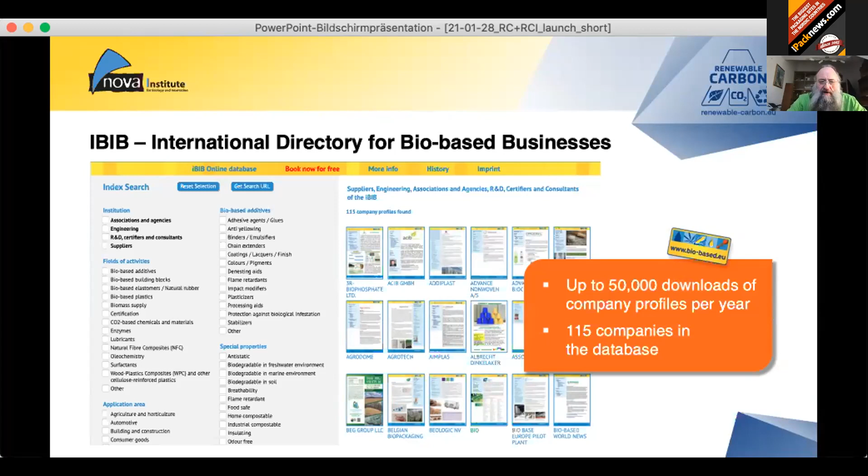Now I come to the renewable carbon concept. You know Ursula von der Leyen, European Commission, Green Deal, and reducing emissions by at least 55% by 2030. A few months ago, this target was made even more strict. Before, it was 40%, and now it is 55%. And it is not easy to achieve this target.

One of the very important backgrounds of the whole initiative is, where are the carbon emissions coming from? What is the real reason for our greenhouse gas emissions? If you look to the IPCC report and make a little different clustering than usual, then you will see that 80% of the greenhouse gas emissions are directly related to fossil carbon from the ground. So we're taking crude oil, natural gas, or coal from the ground and bringing this carbon into the technosphere and atmosphere. And this has to be stopped as soon as possible because this is 80% of the impact.

You can ask yourself, what are the other 20%? The other 20% come mainly from land use changes. So if you destroy rainforest or you switch from grassland to agricultural land, then you also have emissions. These are the other 20%. But the main point is additional fossil carbon.

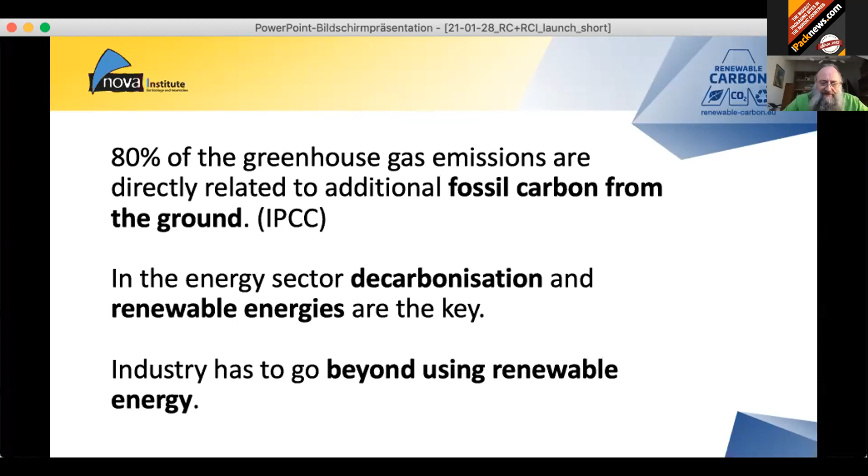In the energy sector, there are clear strategies in Sweden, in Denmark, everywhere about wind, not so much solar in the north, in the south more solar, hydrogen coming from using water for electricity, for example. There are many ways in the energy sector to decarbonize, but the industry has to go beyond renewable energy, because if you go to our sector, chemicals and plastics, you need carbon. You cannot decarbonize your polymers and plastics.

So we think that the equivalent to decarbonization in the energy sector is a transition to renewable carbon in the chemical and material industries, and how we can substitute the fossil carbon from the ground by other carbon feedstocks. And this is the key of the initiative, renewable carbon. And I will explain a little bit further what it means.

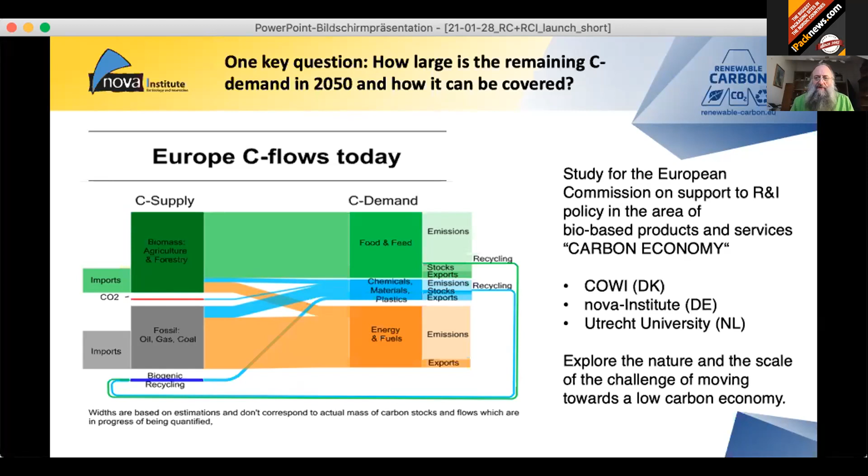I'm not allowed to show the results for 2050 so far because the publication is not out, but we made different scenarios for 2050 to identify which carbon demand comes from chemicals and materials and how this can be covered.

Yeah, to have a quick summary so far, decarbonization is a good strategy for the energy sector, but no issue for chemicals and materials. There is a lasting need for carbon. This is often not well known to the public. 80% of the greenhouse gas emissions are directly related to this additional fossil carbon.

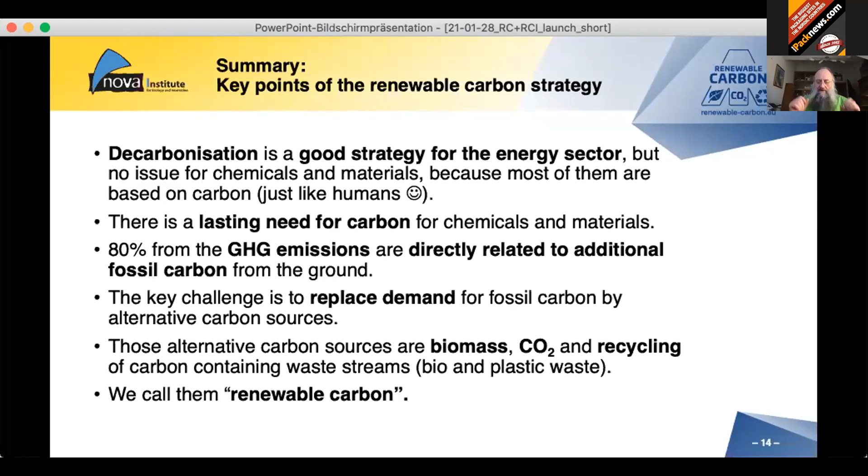The key challenge is to replace the demand for fossil carbon, and those alternative carbon sources are biomass, CO2 and recycling, and we call them together renewable carbon. So we have also a nice clear definition. Renewable carbon entails all carbon sources that avoid or substitute the use of any additional fossil carbon from the geosphere.

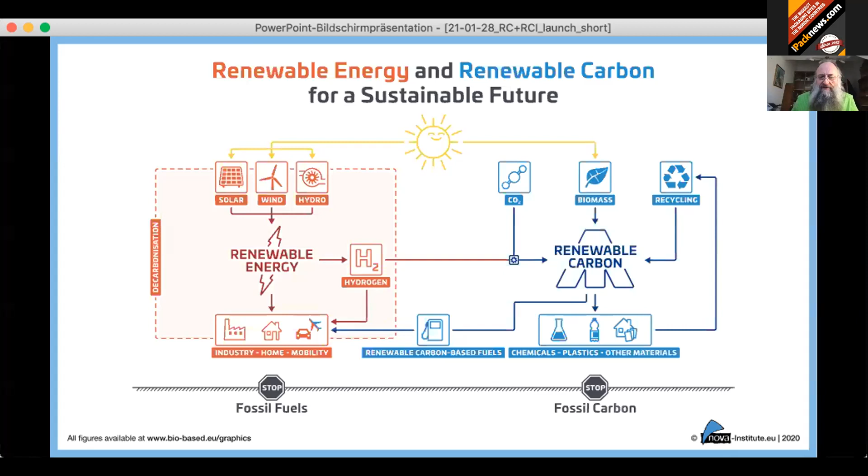And so we can keep producing all kinds of products, but not using additional fossil carbon. The only pathway to the energy sector are the carbon-containing fuels. And this is mainly kerosene. Kerosene is not easy to replace by hydrogen or electric batteries.

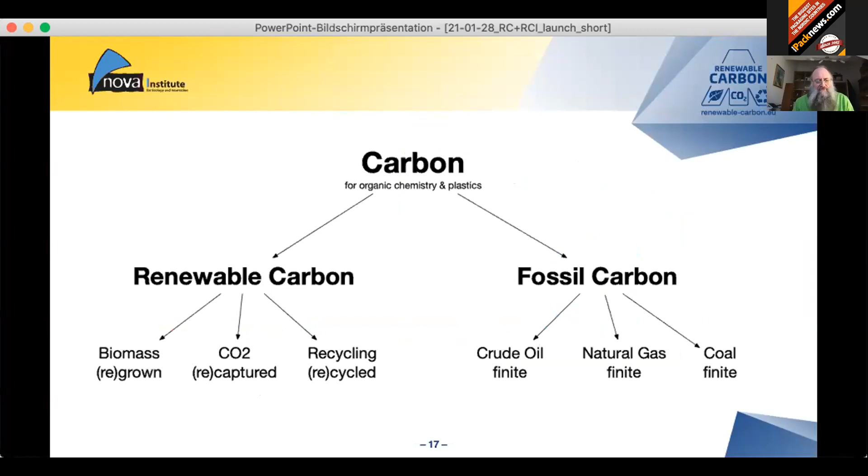Yeah, so if you need carbon, we have two choices. We have the fossil carbon on the right-hand side, crude oil, natural gas, or coal. We should stop this. And on the other side, we have the three: biomass regrown, CO2 recaptured, and recycling recycled. Yeah, I don't think I have to go into too many details here. All kinds of biomass are accepted here: first, second generation, side streams, bio-waste.

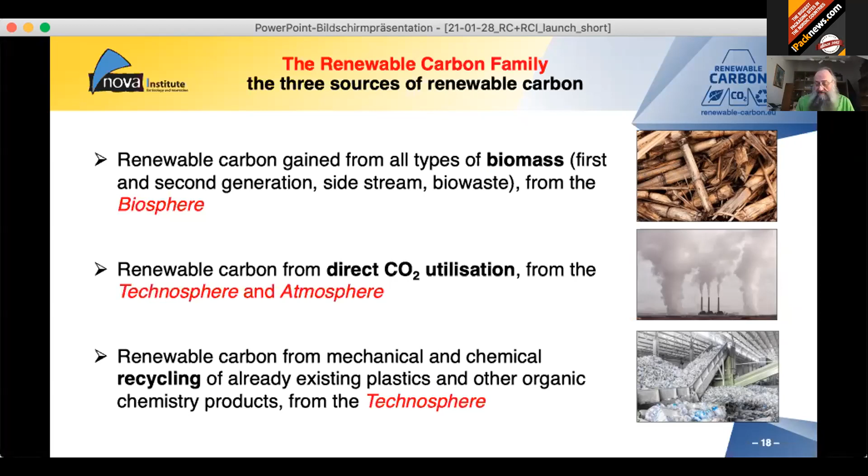For CO2, we have point sources like power plants or industry, or also fermentation factories, or we have direct air capture from the atmosphere. In the technosphere, we mean all kinds of plastics and other organic chemical products we can use in mechanical or chemical recycling. This is the next point in the next presentations.

If we look at strategy in detail, the most important thing here is that today we see a lot of fight and competition between bio-based, CO2-based, and recycling, and don't fight brother wars. The winner will only be fossil carbon. We have to share and win and bring the three solutions together. The best thing would be to also have a joint policy on the three carbon sources, but this is a dream we're working on.

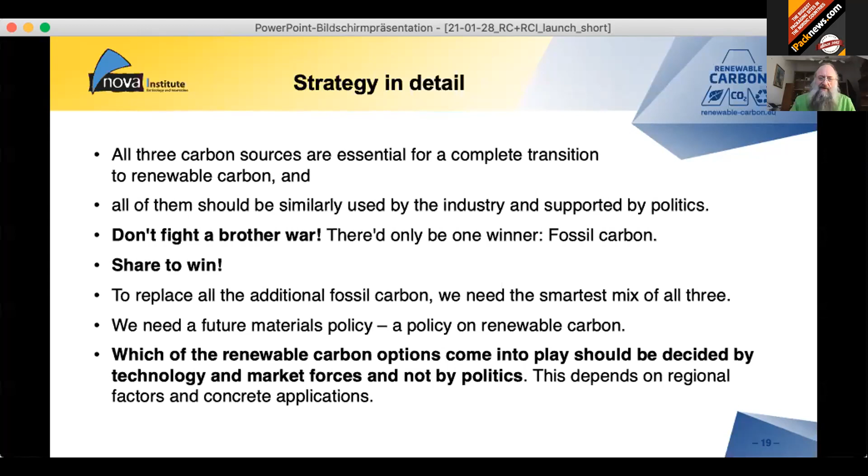If you see the plastics overview of how it looks today, we have for the fossil-based plastics about 360-380 million tons production worldwide. The growth rate is 3 to 4% per year. Bio-based, we have 4 million tons. I show only one slide here, not the topic today.

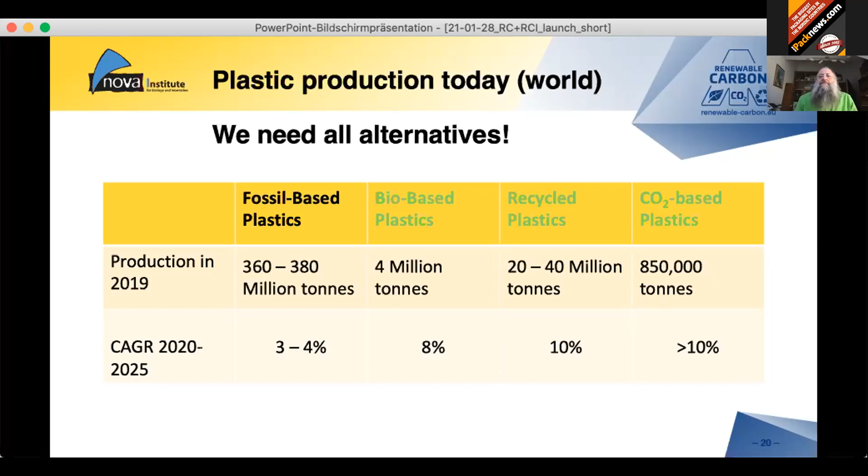4 million tons. Recycled, we have worldwide 10 times more, 20 to 40 million tons, mainly mechanical today. And in CO2-based plastics, we have already production of 850,000 tons. Surprising for you, but I'll show some details in the next slides.

This is one of the possible futures of the polymer sector. You see the production volume 2018. And then if the growth rates continue like in the last 10, 15 years, we will come up in 2050 with 1.2 billion tons of plastics. Let's also show we need to solve problems like microplastics and others, and also the image, because this cannot happen in the wrong social and policy framework.

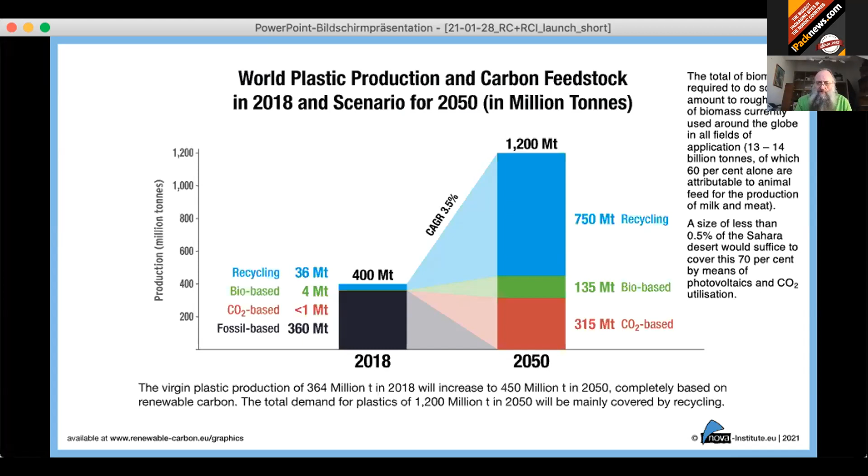But if it would continue, and this year will show the same trend as last year, then we have really a big amount. And this can be covered about 60% by recycling. Of course, chemical recycling is an important part here, by bio-based and by CO2-based. And if you look to the numbers here, what areas you need and so on, it's really possible to do this in a sustainable framework.

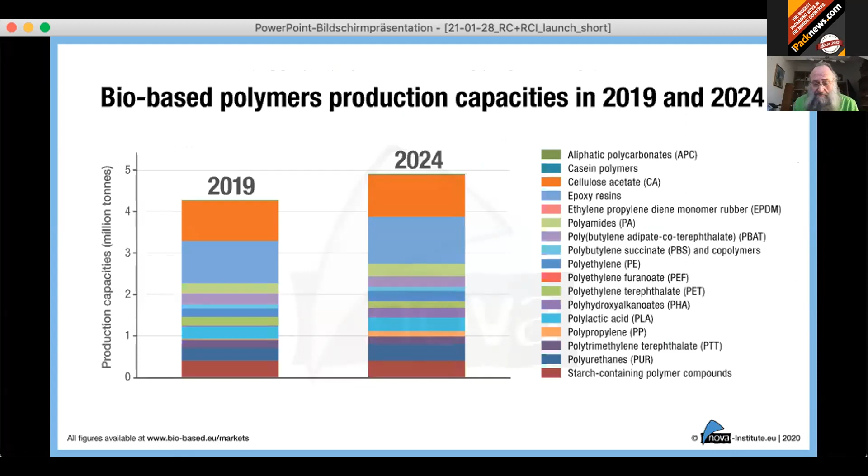And we go in a little bit more detail here from our reports. The bio-based polymer production capacity is today a little bit higher than 4 million, and it will in 5 years be around 5 million. And there are 17 commercially used bio-based polymers on the market. But you can receive the slides later, and also the new report is released today, so the press can also get new numbers, because what's happening now is really exciting.

We saw in the last years in the bio-based area growth rates like in the fossil-based, so no additional shares. The main reason was no political support. But we see now a new trend. Now we see very new data here, and much higher growth rates, up to 8% for polymers, and the building blocks even 11%. So we see really a new trend for the next 5 years. And the reason is not the political framework, but that brands are really looking for non-fossil solutions.

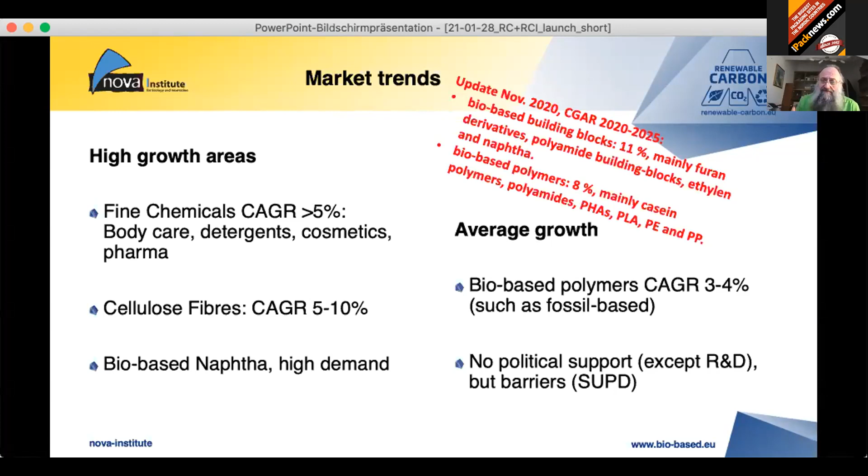One example, Unilever has said that by 2030 they're not accepting any fossil carbon in their detergents, and they're putting pressure on their supply chain that they're not accepting fossil-based detergents. That's a big step. And we see this in a lot of other brands too, and this is speeding up the demand for those new solutions.

When we look to the CO2-based polymers, this picture shows the pathways from the left-hand side, CO2, different processes, chemocatalytic and fermentation and others. And then you see on the right-hand side some specific polymers you can mainly make from CO2, but you see also polyethylene, polypropylene, PET. So finally, with CO2, hydrogen, Fischer-Tropsch, and naphtha, for example, or methanol, all polymers and plastics we know today you can also produce from CO2.

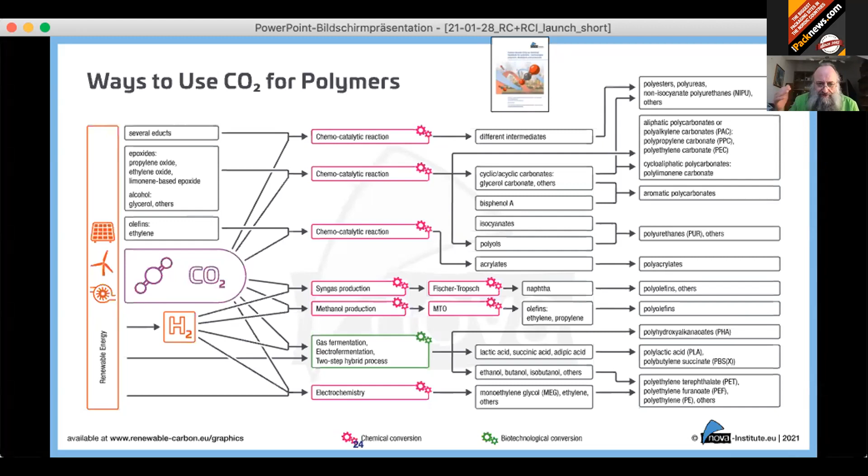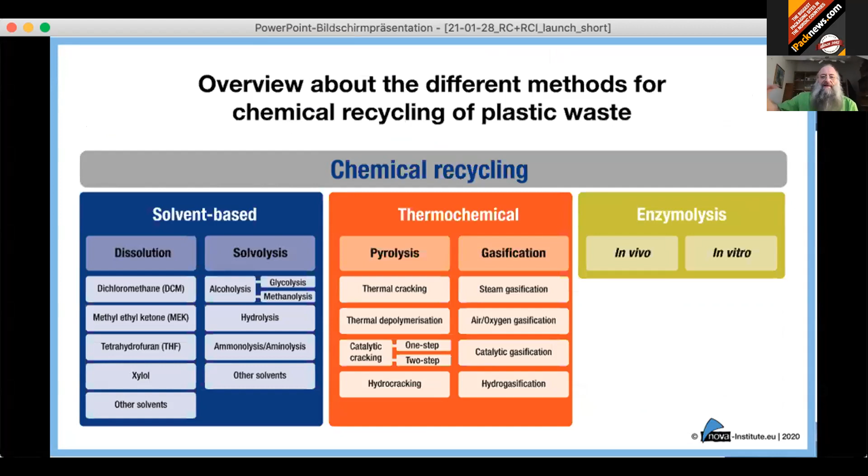It's just a question of the costs for renewable energy. And you have some areas today where you have renewable energy for 2-3 cents a kilowatt hour. And here you can really start using CO2 also for polymers. And another report also published today gives all details on these pathways. On recycling, Lars will show this, so I have only one slide. So chemical recycling is another way to bring plastics back as feedstock.

Now my last slides are on the initiative. The Renewable Carbon Initiative was founded and launched in September 2020, so it's very young, 4 months old only. And the aim is, of course, to support and speed up the transition from fossil carbon to renewable carbon for all organic chemicals and materials. And companies joining it have a lot of benefits.

If you have questions, I will go into details. But I think there are mainly 2 things that are attracting companies to join the initiative. The one is they really love this concept of renewable carbon, because many companies are working in bio-based, in CO2-based, and in recycling, and they want a joint strategy. And so for many companies, our initiative is just the right way to go, because they're anyway going in this direction. So these companies like that we spread this message around, that we have a lot of press releases, contact to the commission, as I just showed to you.

The other part, companies joining it want to have the network. They want to really build up value chains. They want to have solutions. They want to have access to CO2-based polyethylene, to used cooking oil-based polyethylene, those things. So their hope is that in this network of companies, they can really create new processes and value chains.

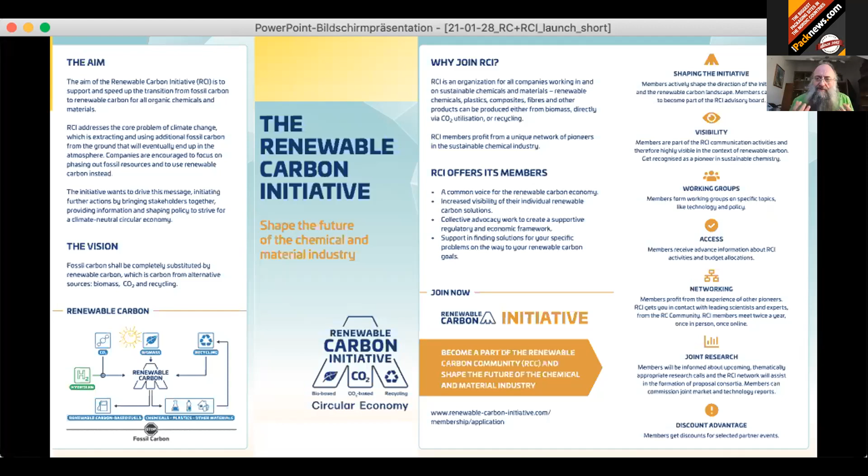Here's a question. I can just look whether it fits now. As I end my presentation, then I go to the questions. So this is, I think, more successful than we expected.

And if a company present today wants to join, the first step is to have a one-hour meeting with me, so that we can discuss all the details: what are your benefits, what you have to deliver. And after this discussion, many companies start the process of joining the initiative.

And my target is to have in 1 year 100 companies, so that we have really a strong initiative, which has also a voice in Brussels, in Berlin, in Copenhagen, in Stockholm, wherever it's needed. We have also a lot of personal supporters, nearly 180, which are often very famous experts in their areas, but they could sometimes not yet convince their companies to join as members.

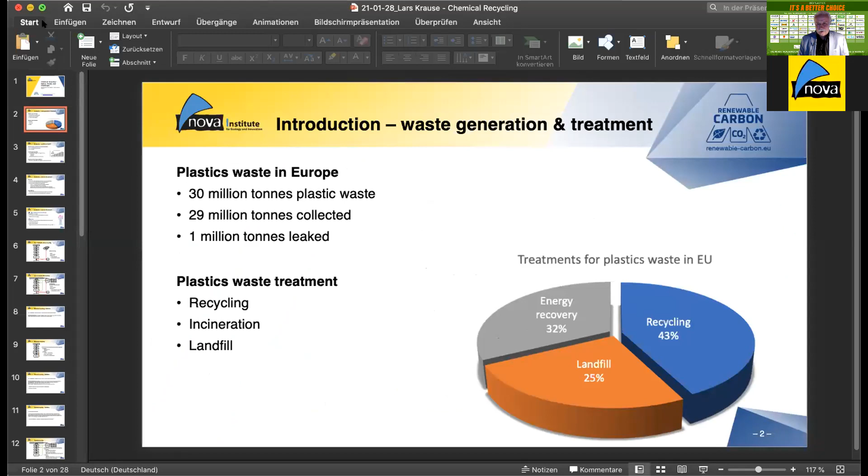All right, Michael, thank you very much for your participation here. I think we have to continue now, and I will hand over to Lars Krause, also from Nova Institute, who will give us an update about chemical recycling today, because there's been a lot of talking around chemical recycling as an alternative for the future. We have mechanical recycling, composting and all that, but I think we will never reach a level where we can recycle everything. But chemical recycling seems to be a very interesting step towards much more recycling, actually. So, Lars, please, the screen is yours.

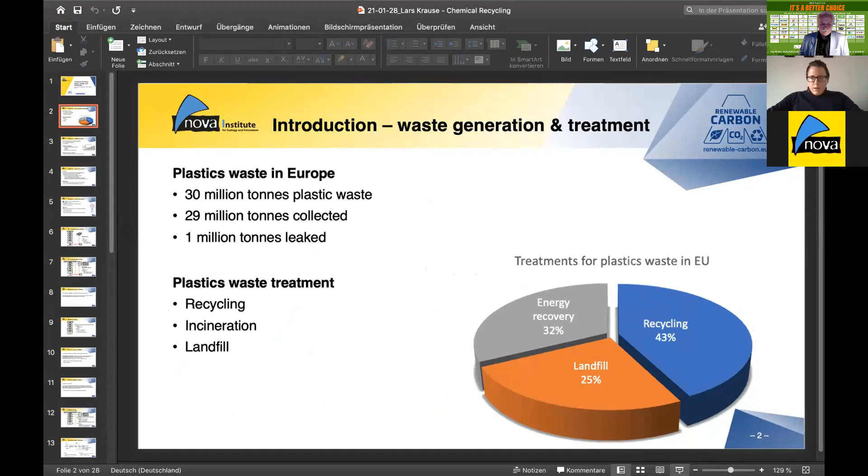Hello everybody, and welcome to my talk, in which I want to give you a brief overview about our recently published report titled Chemical Recycling: Status, Trends and Challenges. This report will cover several aspects around the topic of chemical recycling, including the technologies, the sustainability, policy and key players. In today's talk, I want to focus a little bit stronger on the technologies, but I will also cover several other aspects.

Before we go into the topic of chemical recycling, we need to take a small excursion through the waste generation and treatment in Europe, as well as the quite ambitious recycling quotas which were set up for the European Union.

So in Europe, approximately 30 million tons of plastic waste are produced, and 29 million tons of this waste is collected, leaving approximately 1 million tons of plastic waste that is leaked into the environment. From the collected plastic waste, approximately 43% is recycled, 25% is going into landfill, and 32% is going into incineration for energy recovery.

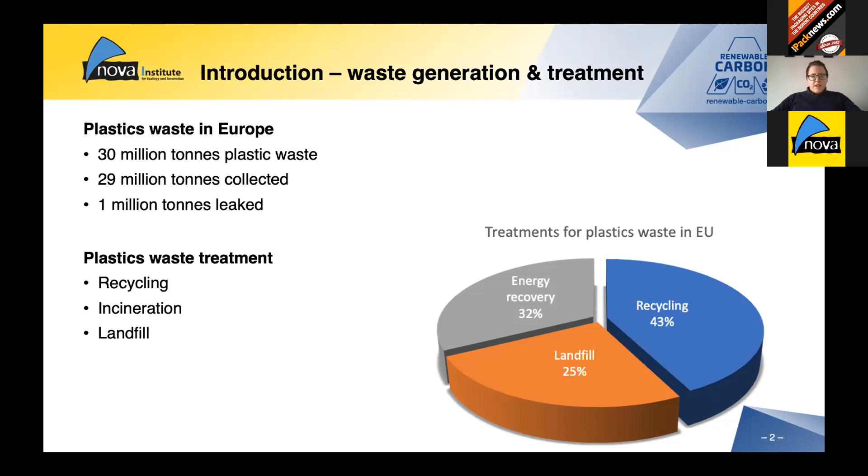The European Union has set up quite ambitious recycling quotas. Until 2030, it's planned to recycle approximately 70% of all packaging materials and 55% for all plastics in this packaging materials. The European Green Deal goes a step further: it's communicated that until 2030, all packaging materials should be either recyclable or reusable, and as a long-term goal, until 2050, the European Union will be climate neutral.

So the question is now, how do we achieve these ambitions. In general, we have 5 options available: prevention, reduce, reuse, recycling, as well as alternative feedstocks. Let's go through the different options.

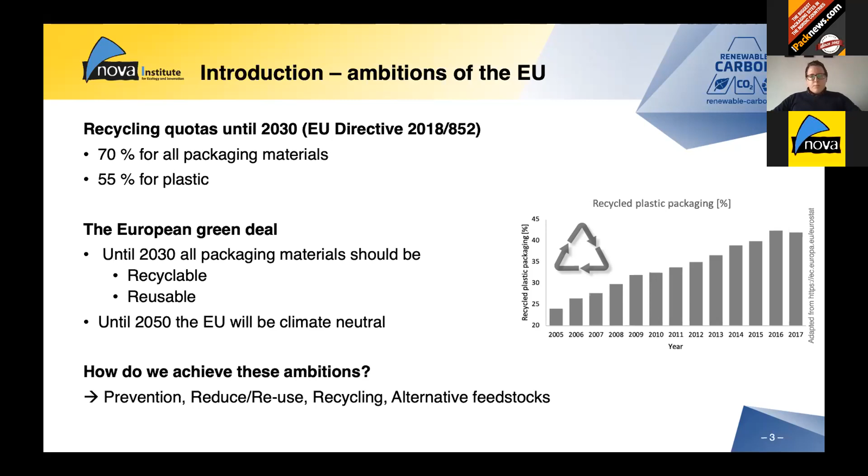Prevention is economically and ecologically sensible for only a few applications, because there's nearly no alternative available for most of the applications. The reason is the overall performance and efficiency of plastics, here we have the density and strength. So plastics represent very strong, but at the same time, very lightweight materials.

Another plus is the general processing properties of plastics, they can be easily formed and reshaped via heat application. Then we have the large sector of specialty and high performance materials, as Michael already told us, so we have a range of plastic products with tailored properties. In general, plastics have better performance than other materials for most sustainability criteria.

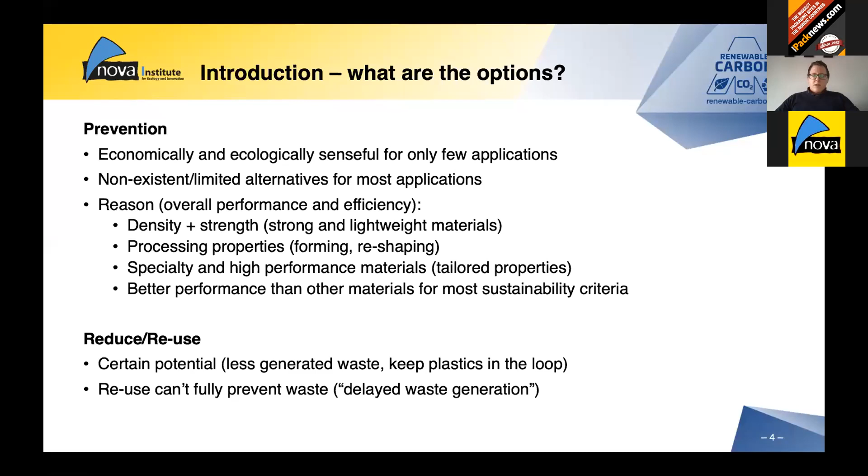Then we have the options of reduce and reuse. Of course we can reduce the amount of plastic waste via intelligent product design, so less plastic waste will be generated then. In case of reuse, we have the option to keep the plastic longer in the loop, but it can't fully prevent the generation of waste, so it's more or less a delayed waste generation.

Now we come to the 2 other options, which are also part of our renewable carbon initiative. First of all, we have the alternative and renewable feedstocks, so bio-based or CO2-based feedstocks. These feedstocks prevent the introduction of fossil carbon into the cycle, but this is not a direct solution for the waste, it's only a solution for the emission of greenhouse gases and the introduction of fossil carbon into the cycle. And then we have the last option, recycling.

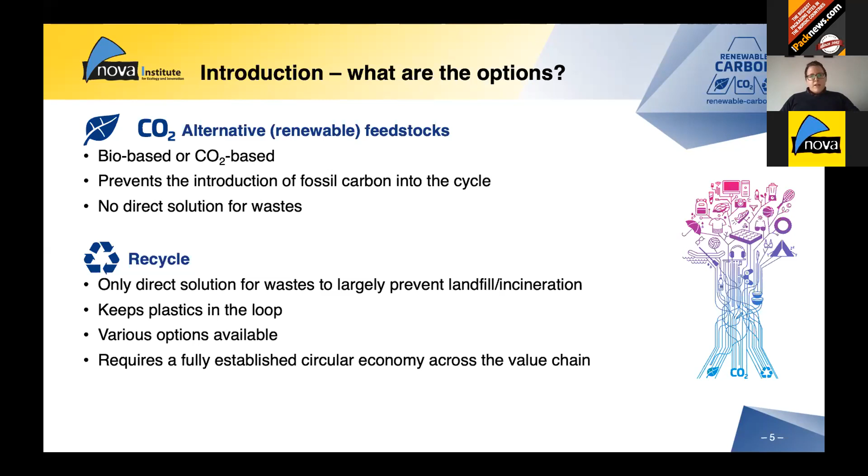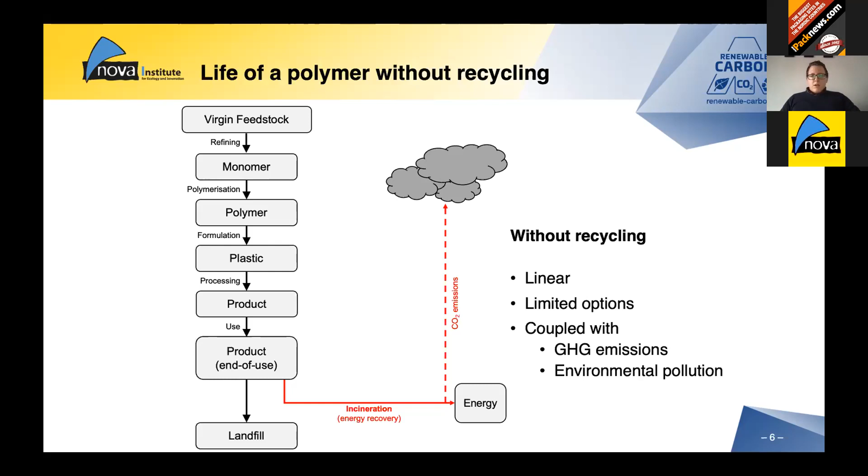Recycling is the only direct option for waste to largely prevent landfill or incineration. Recycling keeps the plastics in the loop, and we have various options available. However, recycling requires a fully established circular economy across the value chain. Let's keep in mind, without recycling, the life of a polymer would be very linear, so we have only limited options to treat plastic waste, in general incineration and energy recovery or landfill, and these solutions are always coupled with either greenhouse gas emissions or environmental pollution.

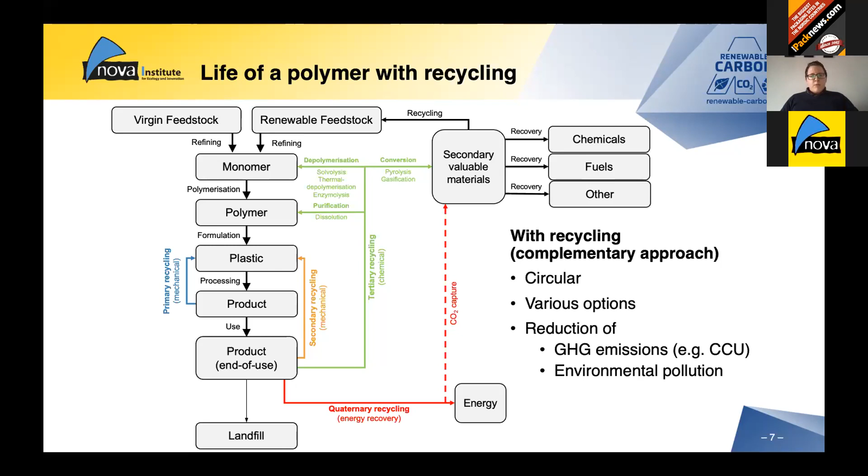Let's go through the different recycling options we have, and let's start with mechanical recycling. The ISO 15270 defines mechanical recycling as processing of plastic waste into secondary raw material or products without significantly changing the chemical structure of the material.

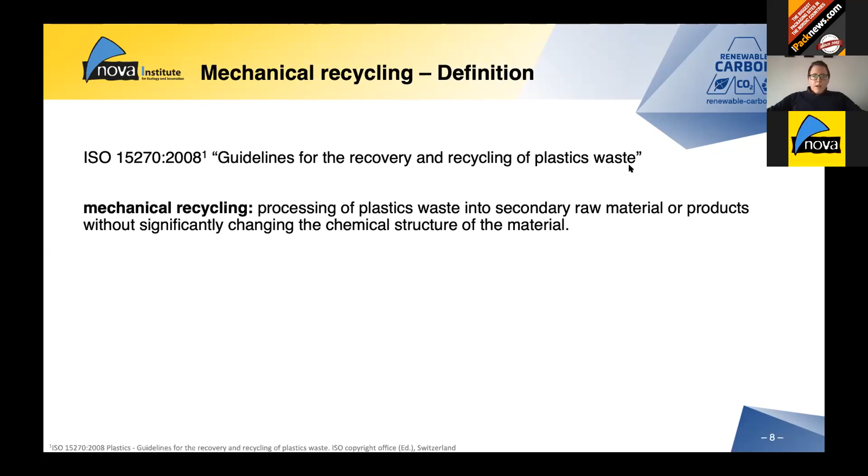Mechanical recycling can be divided into primary recycling and secondary recycling. Primary recycling is more or less in-plant recycling, and secondary recycling is more or less the recycling of post-consumer products. Mechanical recycling has certain advantages: it's a very well-established technology, and the technology is characterized by its simplicity.

However, we have some limitations. Mechanical recycling is limited only to thermoplastics, and we need some kind of pure fractions. For in-plant recycling, it's not that problematic, but for post-consumer products it can become a huge problem, because the waste streams need to be pure. We need one kind of polymer material, and it needs to be cleaned from other organic wastes and maybe also sorted according to color. So it can be a huge problem to recycle this very heterogeneous waste.

The other limitation would be that contaminations are not removed from the waste stream.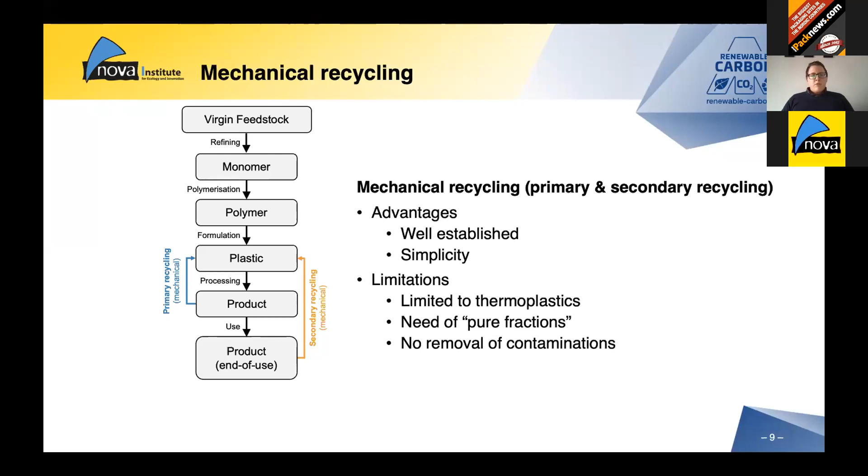And now we come to chemical recycling. If we want to show you a definition for chemical recycling, we have a lot of different definitions available. They are partially contradicting each other. And if you look at all the available definitions, we see that there are in general two different approaches.

We have one scientifically motivated approach and the more political approach. Here you see from ISO 15270 a more scientifically motivated approach. Chemical recycling is defined as conversion to monomer or production of new raw materials by changing the chemical structure of plastics waste through cracking, gasification, or depolymerization, excluding energy recovery and incineration.

This definition would include different technologies such as Solvolysis, Pyrolysis, Gasification, and Enzymolysis. But it will exclude the technology Dissolution, because here the chemical structure of the polymer itself remains unchanged.

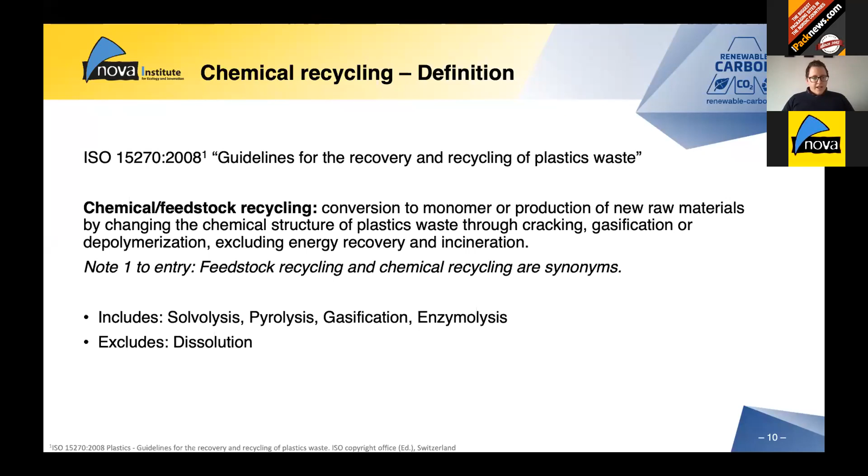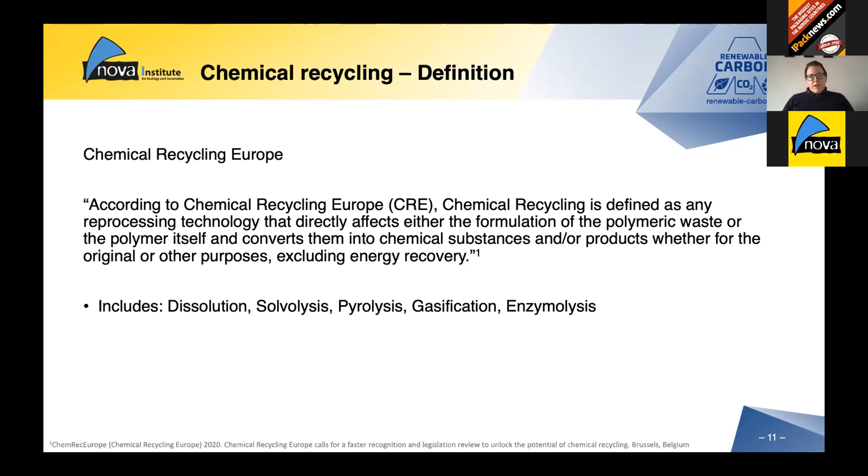This here is an example of a more politically motivated definition, done by Chemical Recycling Europe. Here chemical recycling is described as any reprocessing technology that directly affects either the formulation of the polymeric waste or the polymer itself and converts them into chemical substances and/or products, whether for the original or other purposes, excluding energy recovery. In this case, dissolution would be included besides Solvolysis, Pyrolysis, Gasification, and Enzymolysis.

If we now include all these chemical recycling technologies together, we find some advantages over mechanical recycling. We are not limited to thermoplastics only — the only exception would be dissolution, but the other technologies are not limited to thermoplastics. We have no need of pure fractions, so they can be more heterogeneous compared to mechanical recycling. Contaminations are also removed from the waste stream, and the material is characterized by high quality.

But we have also some limitations. Chemical recycling can be really complex. It is not well established due to the lack of large-scale units. And we have some difficulties proving the sustainability of the different technologies.

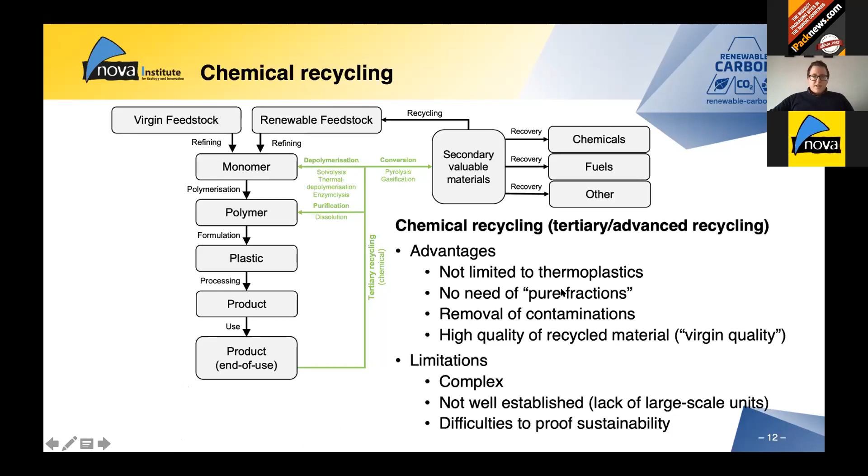Let's go through the different technologies, starting with dissolution. With dissolution, a target polymer can be dissolved in a suitable solvent, and all the other components in the plastics, such as fillers, other polymers, additives, pigments, and so on, are not dissolved. So these components can easily be removed from the target polymer, for example via filtration.

Then an anti-solvent can be added to the solution, and this initiates precipitation of the target polymer. The target polymer can then be removed from the solvent, cleaned and dried. So in the end you have a really pure polymer extracted from the plastic. The remaining solvent can also be recycled, for example via distillation.

The dissolution technology has several advantages. On one hand, we have selectivity for certain target polymers. We can address mixed and multi-layer material, and the output can be directly used — so in comparison to Solvolysis, we don't need to repolymerize the polymer. Toxic substances can also be removed from the waste stream.

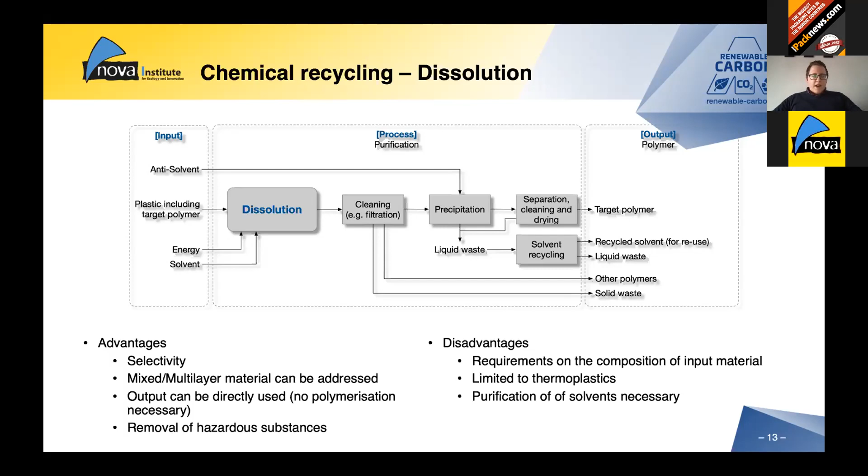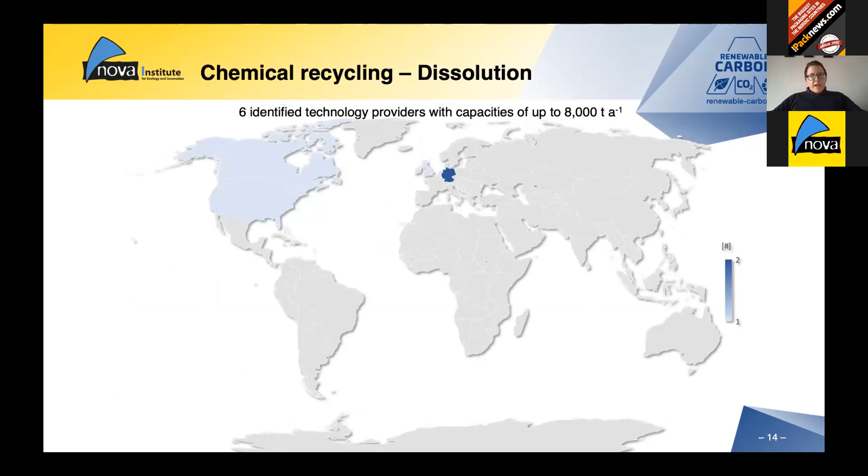In our report, we identified worldwide 6 technology providers for dissolution, and they already have capacities of up to 8,000 tons per annum.

Now we are coming to Solvolysis. In general, the process works as follows: a target polymer can be depolymerized into its building units with a suitable solvent. The building units would be monomers, dimers, or oligomers. After this process, the monomers need to be purified in order to be repolymerized into the polymer again.

So here we have an additional step compared to dissolution. Depending on the utilized solvent and mechanism, we can divide Solvolysis into alcoholysis, including glycolysis and methanolysis, and we also have hydrolysis and ammonolysis.

Here again, the advantages are very similar to dissolution. We have selectivity for target polymers, we can process mixed and multi-layer material, and toxic substances can be removed from the waste stream. The disadvantages are also a little bit similar.

So here again, we have the requirements for the composition of the input material. So we need a certain amount of our target polymer. And the solvents also need to be purified again. And here polyolefins and polystyrene cannot be processed with this technology.

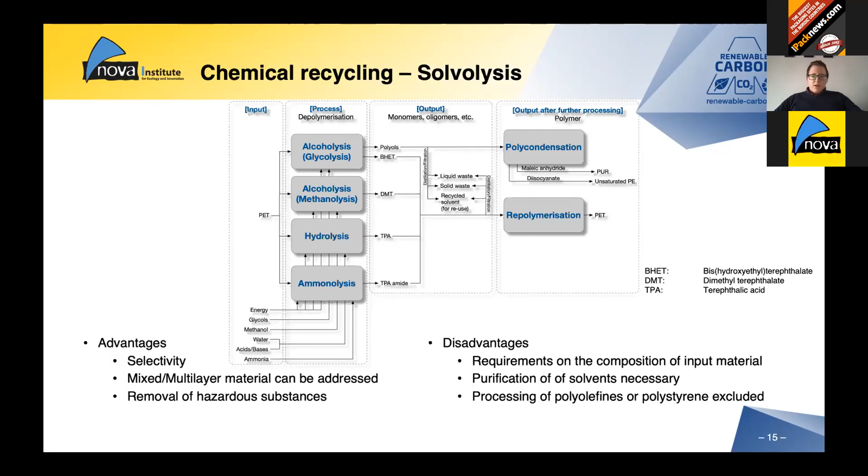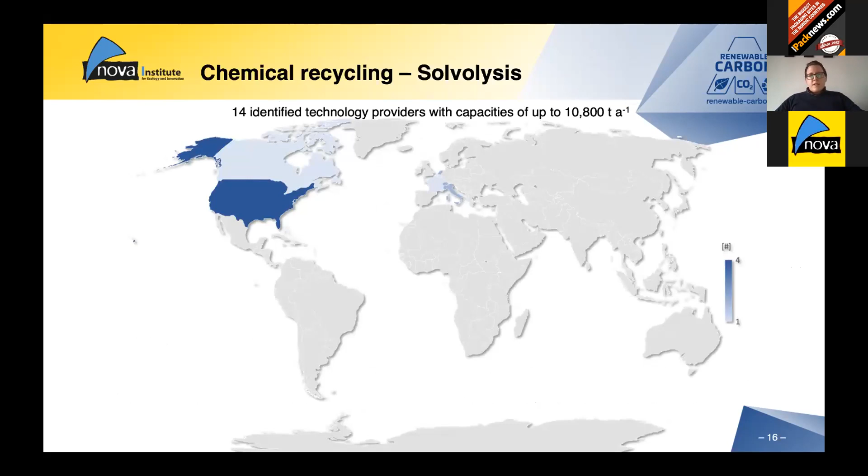For the solvolysis, we identified in our report 14 different technology providers with capacities of up to 10,800 tons per annum.

With pyrolysis, we can process really heterogeneous waste streams into different solids, gases, and liquids. This happens in presence of heat and absence of air. The products are secondary valuable materials or monomers of the polymers. So we can obtain from this process syngas, different liquids such as diesel, naphtha oils or monomers, but also waxes and char.

A part of the needed energy for the process can also be obtained from the partial combustion of the feedstock. So it can also be provided by the feedstock itself. And on the advantage side of this process, we have that a range of different input materials can be processed. So even plastic waste together with some bio-waste. We have a large spectrum of obtained products, and toxic substances can also be removed.

But we have also some disadvantages. These are the high energy demand, the emission of pollutants. We have less selectivity for products. So on the one hand, the large spectrum can be an advantage, but it can also be a disadvantage, especially if you really want to obtain a special fraction of all these different products.

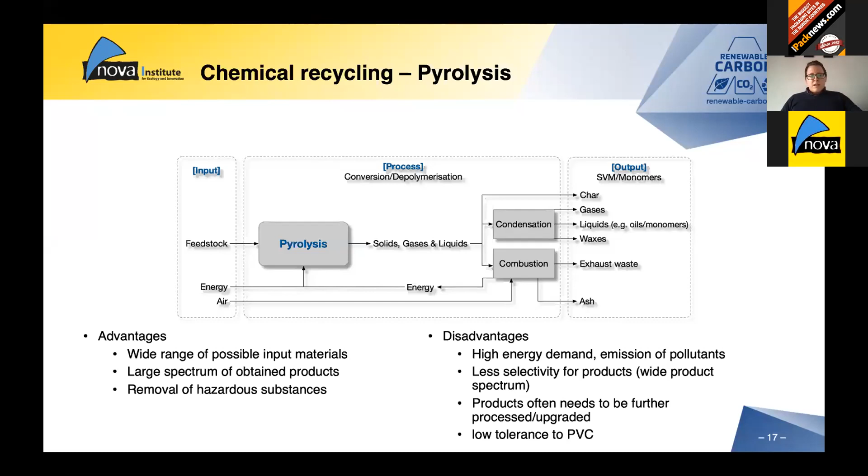Another disadvantage would be that the products often need to be further processed or upgraded, and the process has a low tolerance for PVC. In our report, we identified 44 technology providers for pyrolysis with capacities of up to 38,000 tons per annum.

The gasification is also able to process a very heterogeneous feedstock. This happens also again in presence of heat, but now also in presence of air and oxygen. And the product which is mainly obtained is syngas. Here we have again advantages. So the process is very robust regarding the input material. We have various applications for the synthesis gas. And again, toxic substances can be removed from the waste stream.

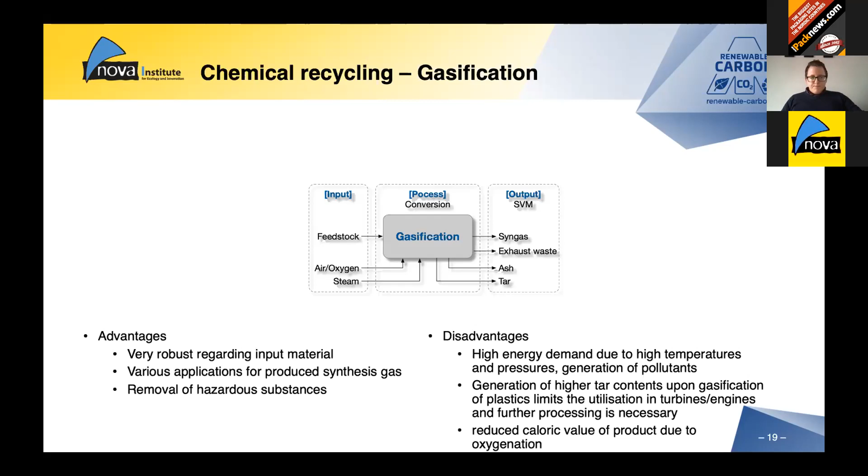Disadvantages are the high energy demand due to the very high temperatures needed for this process. We have high pressures and also again the generation of pollutants. And a special case for the processing of plastic waste is the higher tar content, which you also have in your product. So if you want to utilize the obtained gas, you need to consider this if you want to use it in turbines or engines. And we have also a reduced caloric value of the product. In the report, we identified 8 different technology providers with capacities of up to 100,000 tons.

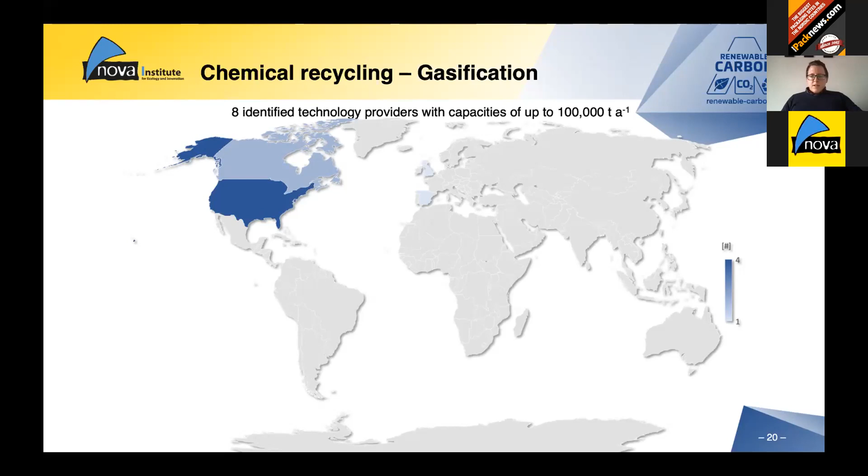And last but not least, another chemical recycling technology is the enzymolysis. So this covers the depolymerization via biocatalysts, so enzymes, microorganisms. The enzymes can be highly specific. So you have chemo-, regio-, enantio-, and stereospecificity of the enzymes for the polymers. Overall, the process can be conducted under very mild conditions in comparison to the other technologies. So this process also works at room temperature and at nearly atmospheric pressures.

Another advantage is the fine-tuning. So you always have the possibility to adapt your enzymes via enzyme and metabolic engineering to the process. However, the enzymolysis is rarely developed and currently at lab scale, and you have at the moment relatively slow turnover.

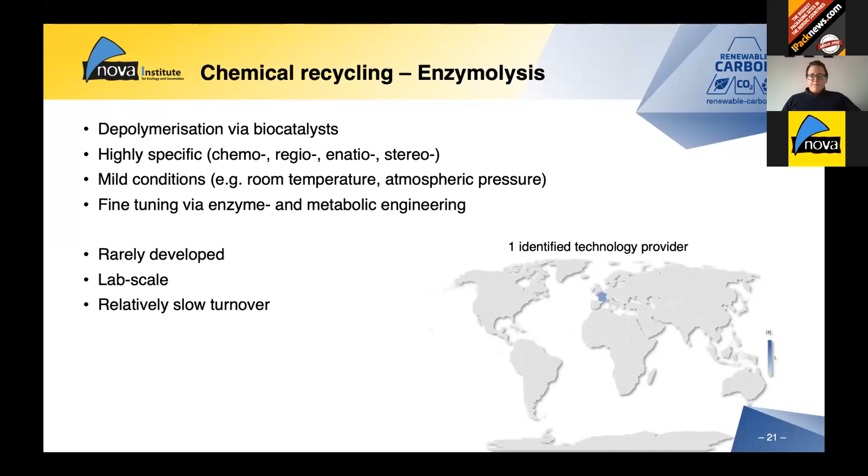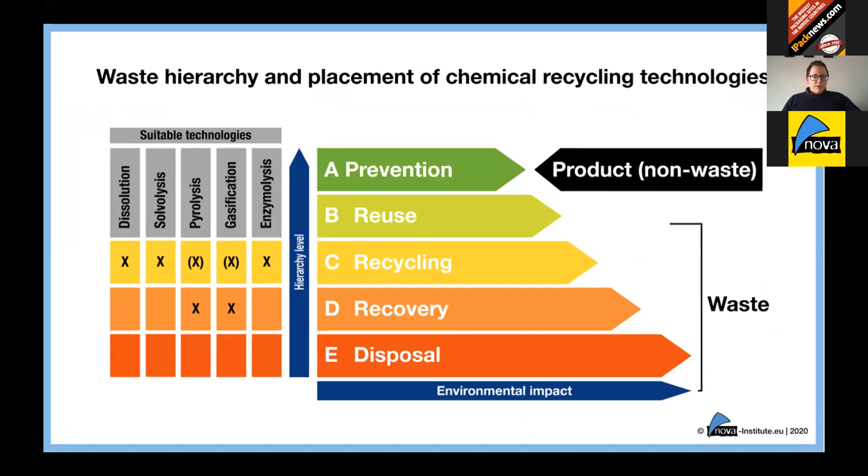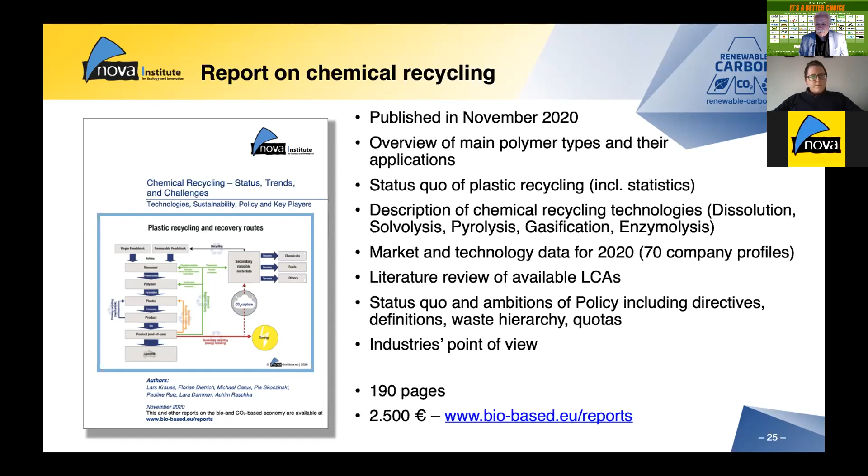Yes. You did show a lot of figures here. What is the total capacity of chemical recycling today if you look at your figures? You said it was 100,000 tons for gasification, I think. And if you put them together, how much is it? I think if I look at the graphics, I would say nearly 200,000.

175, yeah. Maybe 170. Yes. Maybe so, but it really depends. So in this case I showed you only the maximum capacities. There are also some companies that are at the very beginning, of course. So it's difficult to sum this up for everyone. Some companies are still under development and can't tell you numbers.

But this figure was important to show that there are already companies who can provide this capacity, because in the discussions many people are telling you, okay, this is not a real thing, they are all under early development and can't deliver, but this is not really true. There are some companies who are really well established and evolved in the last years, and we were also surprised by these impressive numbers.

So that's what's already available, and if the policy would be a little bit more enabling in the future, I think this will further improve the development. Because at the moment, I think, especially the startups don't want to invest until the political framework is clear.

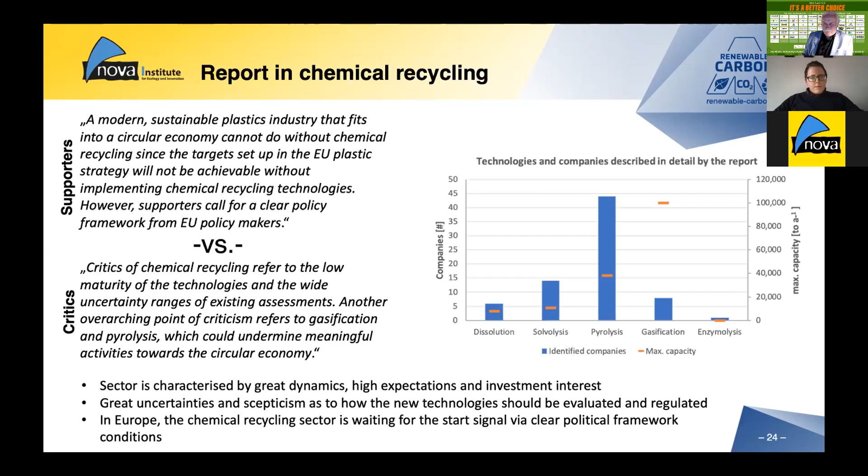So the question here is, do we have plants with a really high capacity to really prove this? This is the only lacking thing at the moment. The LCAs only make some assumptions, and this really needs to be proven in the future. But in general, every LCA we have seen so far showed a very promising picture.

And I think in the near future, this really needs to be proven with large-scale units. Okay. Sreparna Das asks, how much does the fact that chemical recycled grades can be used in food contact applications help its case to be favored?

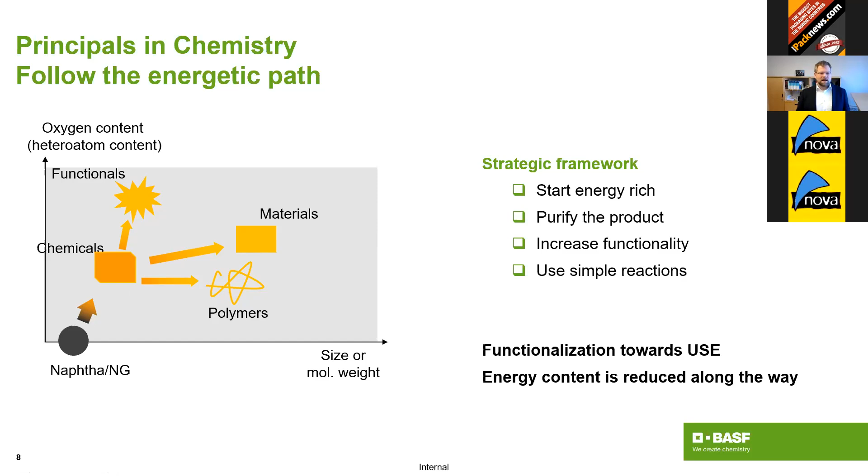And what we do as a chemical industry is, in first order, we introduce oxygen into crude oil. And then we derive out of that materials, polymers, and other functional materials, for example. So very important to understand is we start energy rich, we start with purified products, we increase functionality, and we try to do this with very simple reactions. And this is all leading down the energetic path. I will show you on the next slide.

And during this path, we are losing the intrinsic energy the molecules contain. So that's important for you to understand. We start really energy rich and we are losing the energy by producing polymers. And what you do not see on this screen is that this is just the precursors of our polymers and our plastics. Plastics and other chemical products come at stage 3 or 4 after crude oil. So it's a long journey from crude oil until plastics.

And if you remember the presentation of Lars, the volumes we're talking in ChemCycling, you get a real feeling for what is possible today and what not: pyrolysis recycling volumes in Europe from plastics are about 15,000 to 20,000 tons today. And we are operating an integrated production site in Germany, in Ludwigshafen. Our demand of raw material naphtha is roughly 2 million tons per year. So it's a huge difference between what is available today and what we need to process.

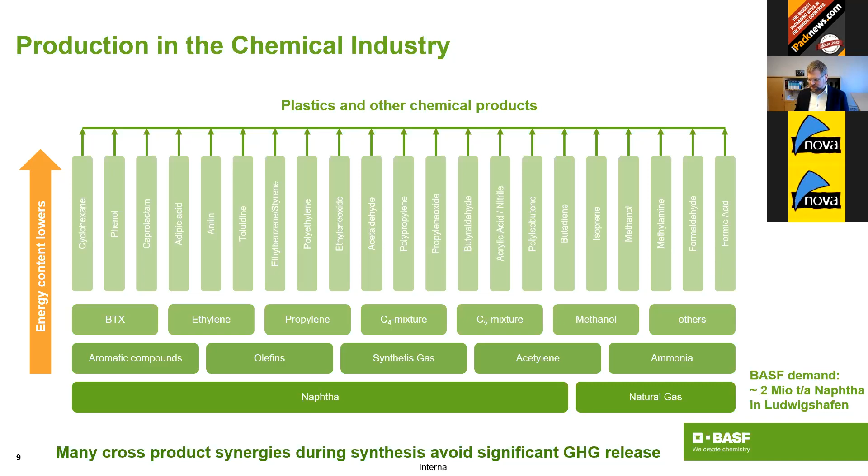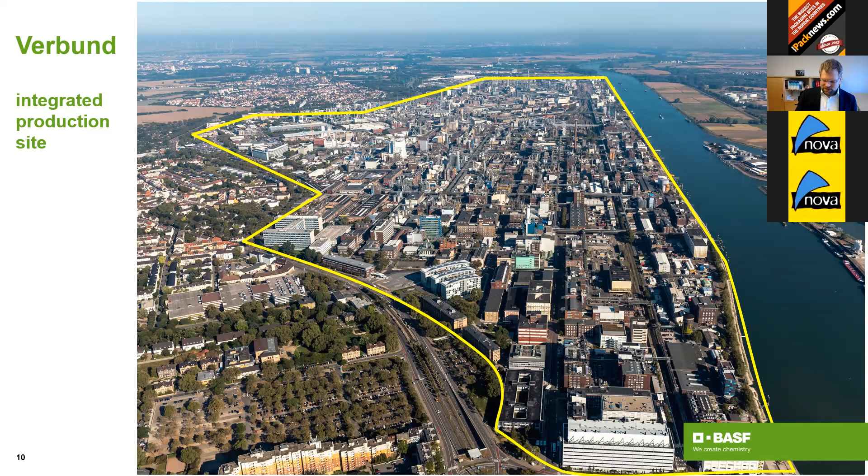But you have to understand that in the same time, we doubled our output. We have more than 100%, roughly 104% increase of materials as output within Ludwigshafen, for example. So yes, we already have reduced our carbon footprint today, and we would like to maintain our organic growth, but honestly, the low-hanging fruits of saving CO2 emissions have been harvested. From now on, it's really going down to the bones. We have to do a deep dive into where we can save CO2 emissions.

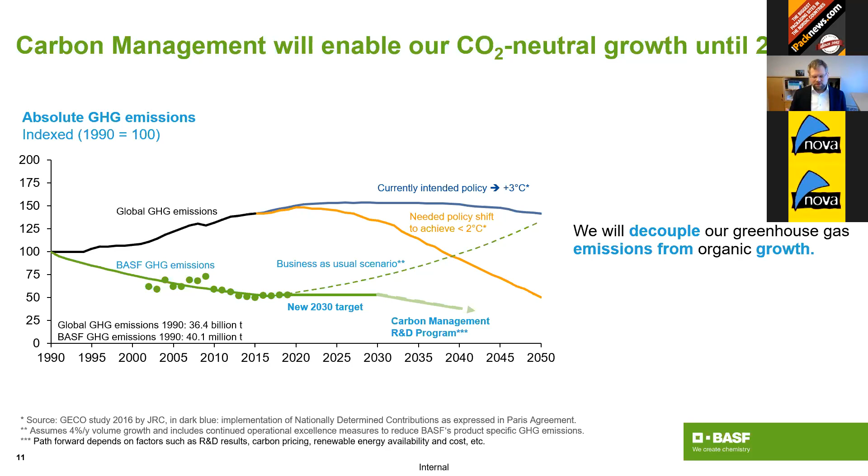I showed you the Ludwigshafen site in the last picture. We are operating 6 of those production sites, all equal within raw material demand. And today we are investing into a 7th production site in south of China. As you remember, we are consuming 2 million tons of naphtha every year alone in Ludwigshafen. This tremendous amount of raw material, today fossil raw material, has to be somehow compensated. So yes, this is a challenge, and let's see how we can manage in the next years.

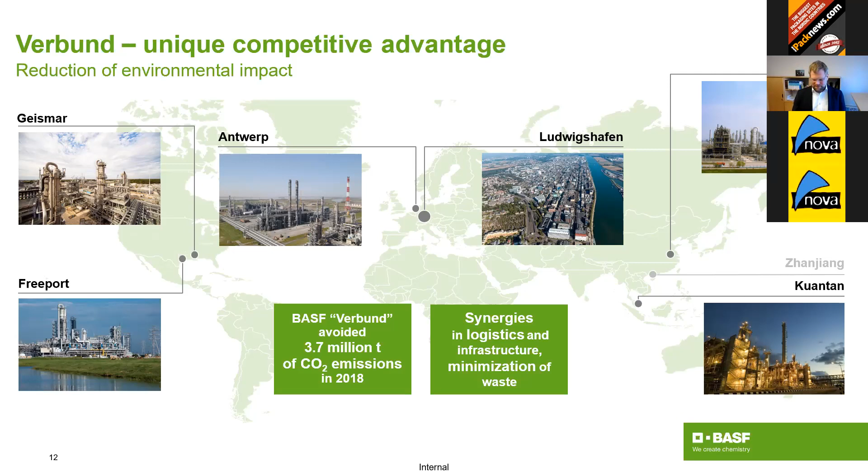So that was basically how we produce. Let's see how we can move on into the future - a little bit about raw material change and the opportunities.

It was nice to see this morning in the presentation that there is a willingness at the customer side. Typically I separate my presentation here with 2 news for you, 1 good news and 1 bad news. I'll start with the good news: yes, the customers are there and they are demanding this from us, and they are even faster than legislation. So this is a very good sign.

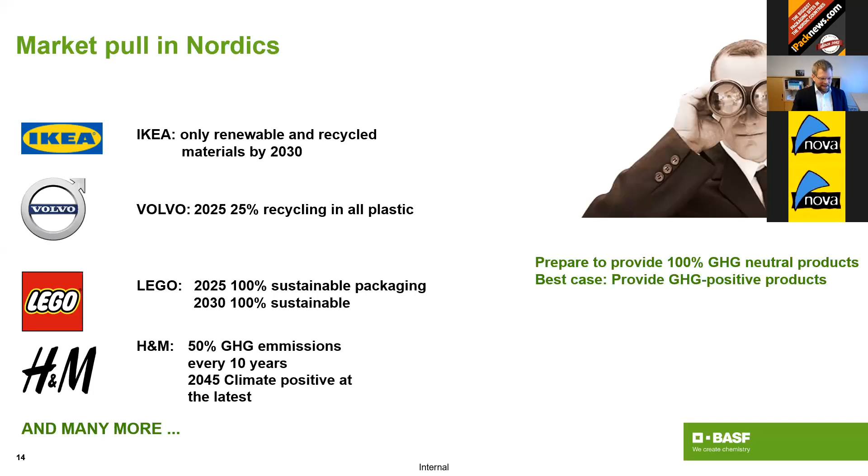Now to the bad news. Yes, in fact BASF is a plastic producer, and we have a lot of trouble with plastics in the environment, and this needs to be changed.

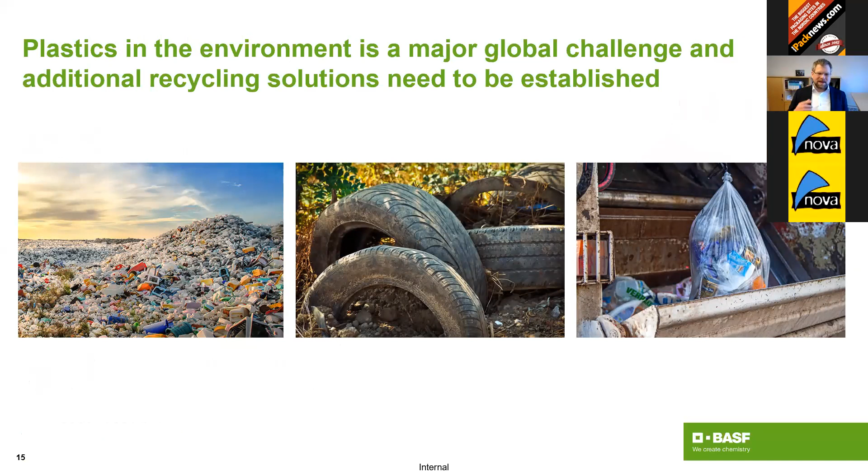We will not reinvent the wheel today, but we will help to make it really circular. This is how we imagine this. Today we have a very linear environment, a very linear plastic industry. Plastic is produced, consumed, and wasted - typically wasted in the majority around the world in landfill and littering. We are happy if it lands not in the ocean, but under controlled conditions.

For us, the next step is, can we reduce this amount and use at least the energy? That's the second step. Now it comes to what we are looking for: can we close the loop? Is it possible for us to recycle plastic, not only in energy recycling, but how can we reuse the material?

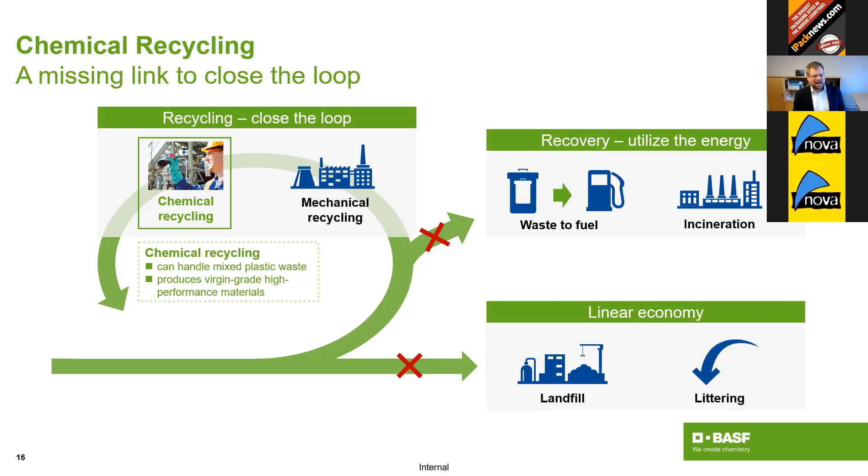From our perspective, the first step is to recycle mechanically from plastic what is possible to recycle mechanically. The second step is, can we chemically recycle those fractions which are no longer mechanically recyclable? But honestly, we have to be aware that the recycling quota of mechanical recycling is not 100% - I think it's around 90, 80, 70% of that material which is pure enough. The chemical recycling is not better than that.

As I told you before, if you do chemical recycling from plastics, and we're talking about polymers here, you have to start and come back to square one, getting back from polymers, from plastics, back to chemicals, and probably back to crude naphtha. As I mentioned at the beginning, we normally have an energy-rich starting material and we consume the energy of that material. We now have an energy-poor material in the form of plastics. So whenever you start chemical recycling, you have to refuel that energy, and that is the biggest challenge we have today.

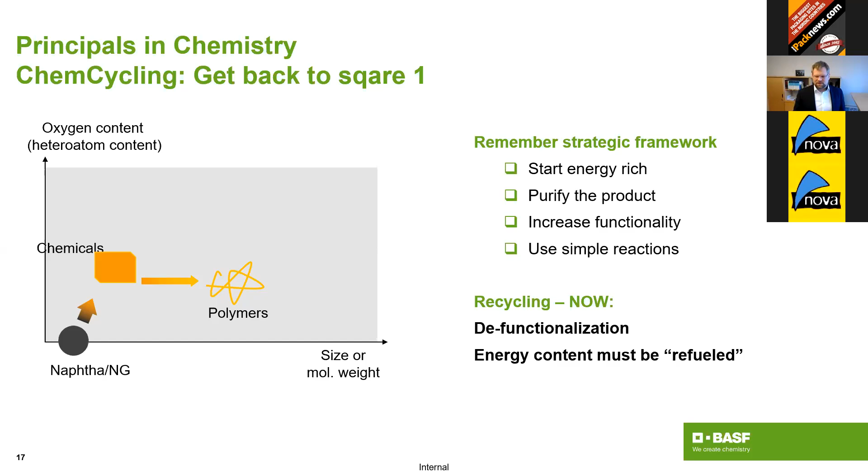So if we are coming back from plastics and refueling the energy, we're talking about a quota of 20,000 tons, and this alone is already really challenging to refuel. Once this is done, for example with our investment in companies like Quantafuel, which develop those pyrolysis technologies and chemical recycling technologies, once this is done, we have to refuel this into our chemical value chains.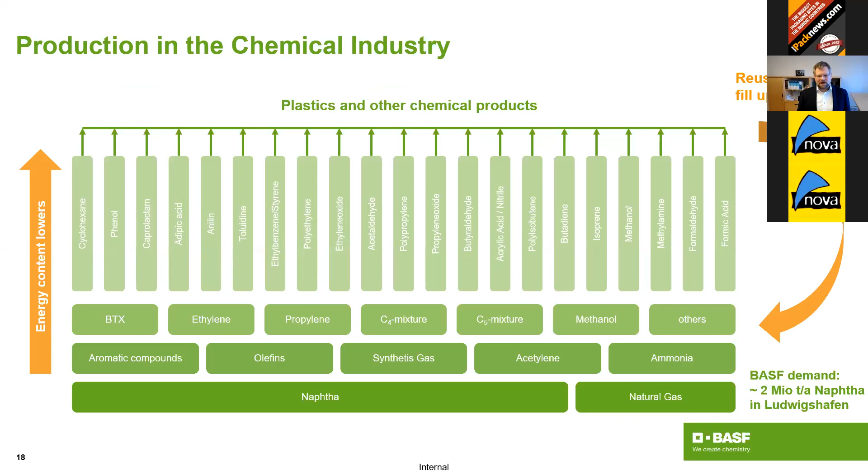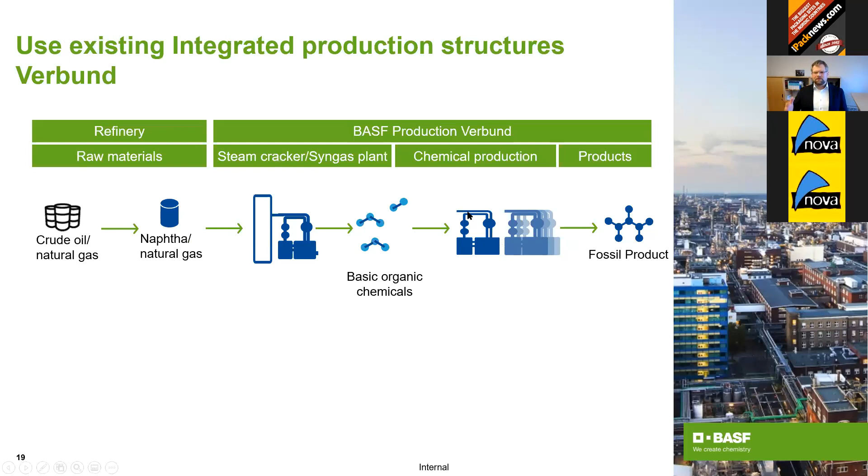And that's what I show on the map - this is pretty much the last slide today. Today, we use crude oil in the heart of our production structure, which is the steam cracker, producing basic organic chemicals, and then we start the production along 2, 3, 4 steps to get a fossil-based product. What our target is, we'd like to use recycled material. We produce a kind of naphtha which is very similar to natural or fossil naphtha, and this is then introduced directly at the beginning of our value chains.

This is the same - you have basic organic chemicals produced from that, and you end up with a typical product which is chemically identical to the pre-run fossil product. This is extremely important for our customers. Given the volumes we operate, we are forced to maintain the quality and specification of that material throughout the years. So this is for us the most elegant and easiest way to guarantee that our products do not change their behavior - they still stay the same, but are now produced from a more and more recycled share.

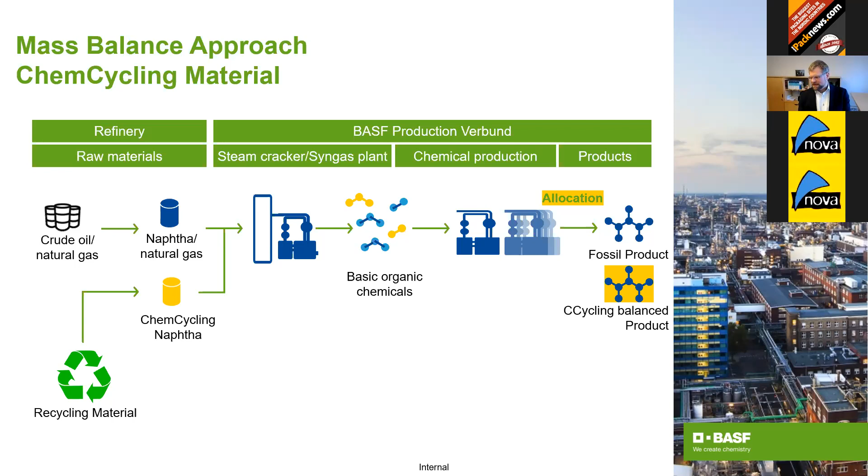This is what we do, for example, in-house. And I think, Lars, you also mentioned in your presentation that our values are quite transparent and publishable, open for discussion. So with this, I would like to end my presentation.